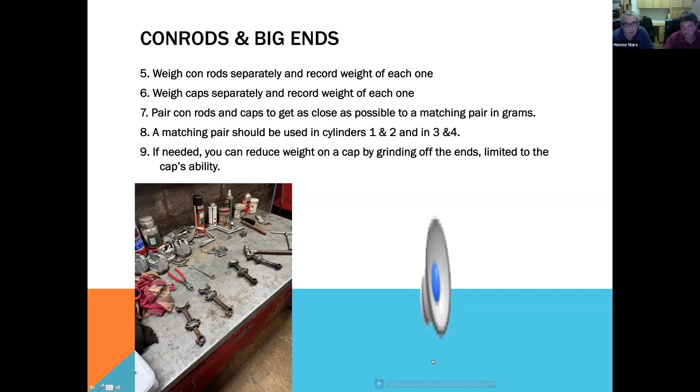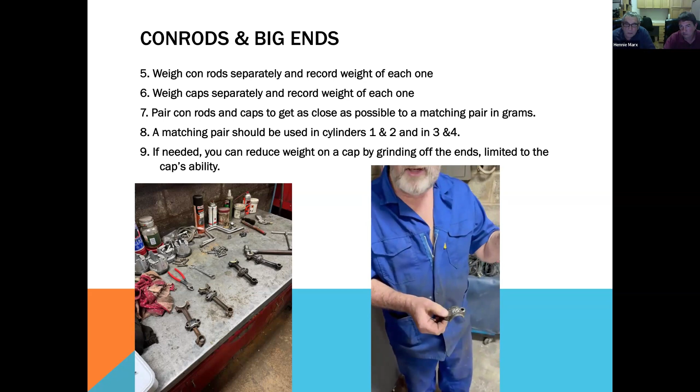Taking a little bit off there. Now, modern connecting rods on the small end have also got what they call a weight block, which means it's easy to take weight off end for end, which is the correct way of doing it. But because it's such a low revving engine, and also I'm adding white metal here, which is going to throw my weights out as well. But at least I'm reducing the places for...

Just a side note, on modern engines, the con rods have a 1 gram difference in weight, but on the Model T you allowed 2 grams of difference in weight per 2 cylinders.

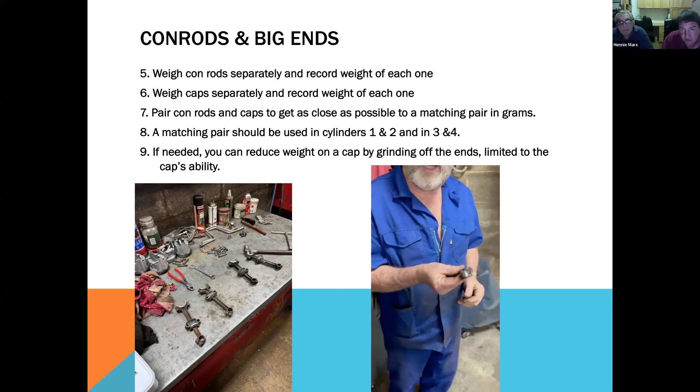So then, as Hennie said, you mark your corresponding caps and rods with punches, and then you place them in a con rod boring machine for the rough cut that we do before casting will commence.

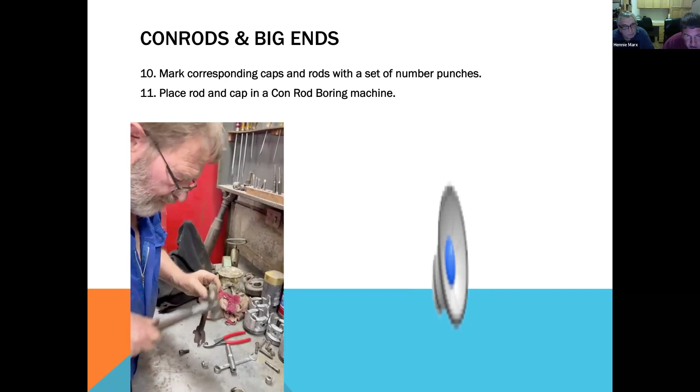What Kevin is doing now, he's preparing the con rod to go into his boring machine, and therefore he needs to have a stable point.

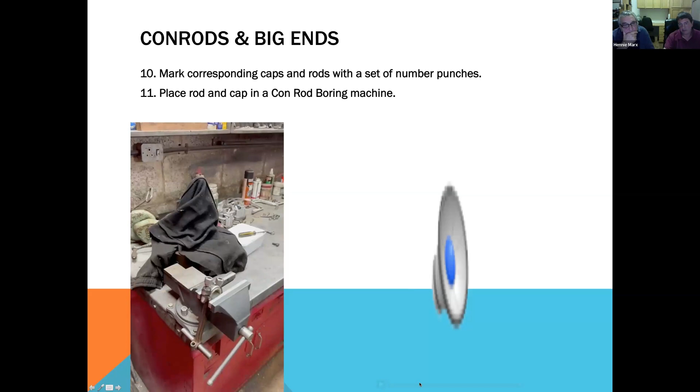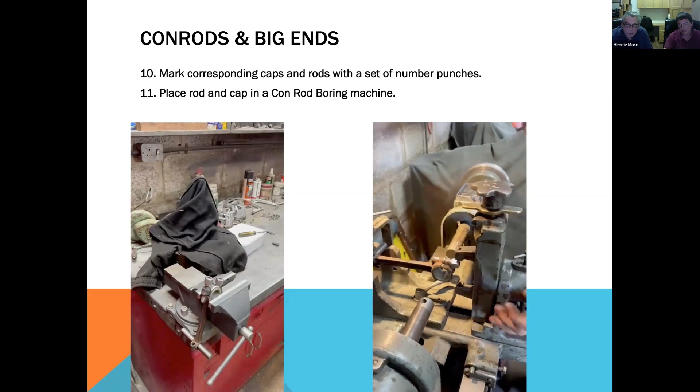Now watch what's happening to that rod. Yes, you see how I'm pulling it sideways? Now, to a certain extent, I can move it.

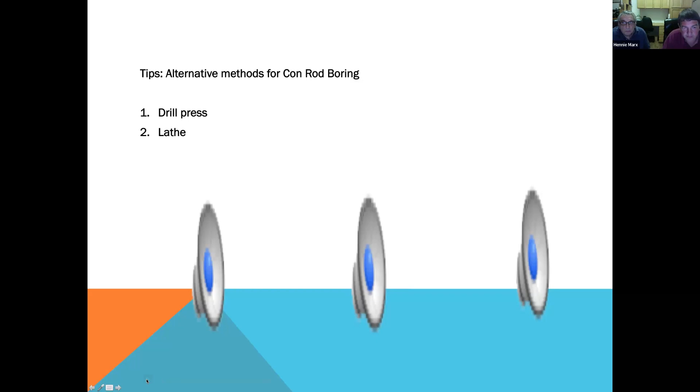So, if you don't have a Conrod boring machine, what are the alternative methods to do the job? Kevin explains now over here how you can use a drill press as well as a lathe to reach the same results, in one end of it.

That hole, you're going to put a gudgeon pin in. You can clamp it in there, you can weld it in there, you can do what you like. Welding is not the ideal answer. An accurate hole in a grub screw would be better because welding is inclined to pull you like that.

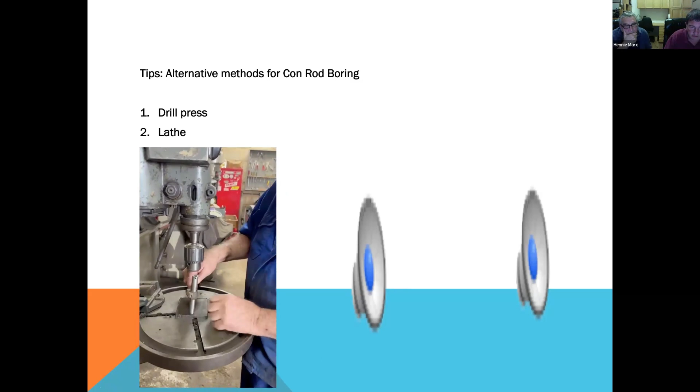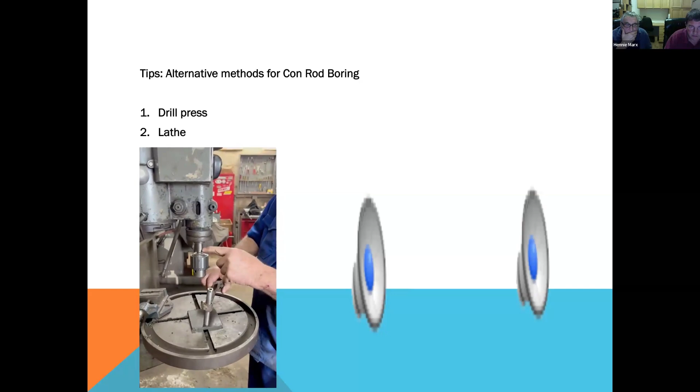Once you've done that, you take an old gudgeon pin, you put it in that hole, clamp it, then you move this plate over. The plate would be longer, of course. So we'll assume that this is now being held. We know now that this hole is square to here. And the gudgeon pin is now parallel to that shaft there. Gotcha. Yeah, so that's what we've got.

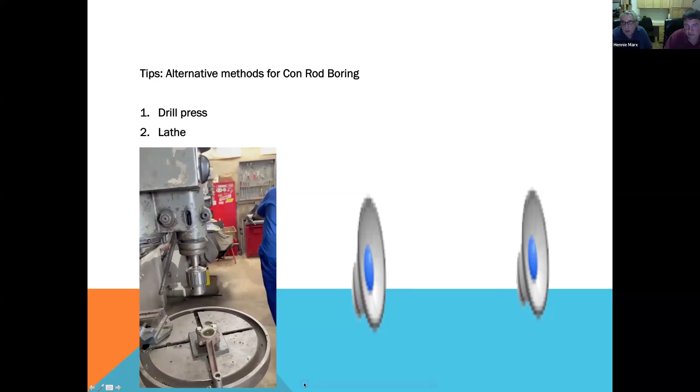Just as a support, what we're going to do is have a plate up here with a thread in it and a bolt. You thread it in and bolt it onto there. So when you put this in, you can center it up perfectly.

Touching there, because this is a constant, that's a constant, and that's a constant. So you hold that like that. You can put the head in this way, it doesn't really matter. What you've got to remember is every time you change the rod, one of these bolts must never be moved. You put a lock nut on it and leave it there.

So you back this one off a turn, you can take the end one out. Of course, you can take the rod off, and put the rod back in again, or the next rod, whatever. You can now bore this hole here, and face this side. You can then turn the rod over to face the last side. That's one way of doing it.

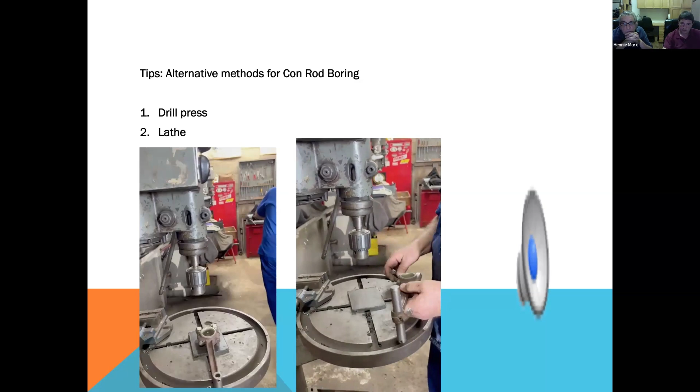You can do exactly the same thing in a lathe. It depends what you've got. Now, the one I did for Philip, he's got a method like this.

Put a piece of metal on it like that. And we're going to put a drill bit in there, or a boring bar, and we're going to drill a hole in there the size of your gudgeon pin.

This here is held here and it's clamped, it's got a light clamp on it, so this cannot move. By putting your drill bit in there and drilling a hole, you are holding this absolutely at 90 degrees, or square, to the axis of your lathe. So we put that through the hole.

Then once again, a grub screw or something to hold it. Now we've got a gudgeon pin sticking like that. Take our con rod, that's our gudgeon pin, it's like that. Now when we turn this back in again, we can go back in until the center line of your chuck is on that center line there. So now that and that are parallel, so this here must be parallel as well.

All you need now is, once again, a short fine thread screw in this plate under the nut. You're going to put in a lock, and another one here to hold that, and adjust that like that. So now we've got this whole thing held there on the center line.

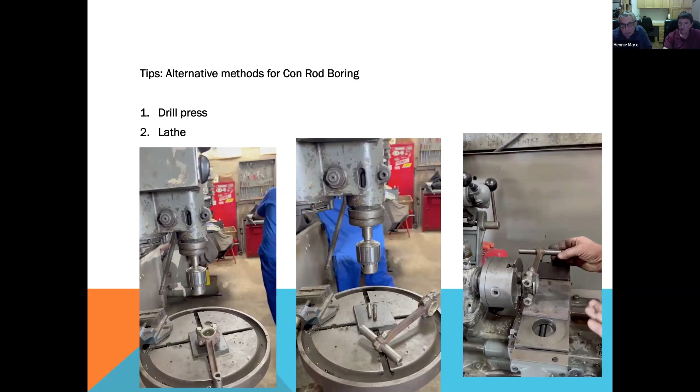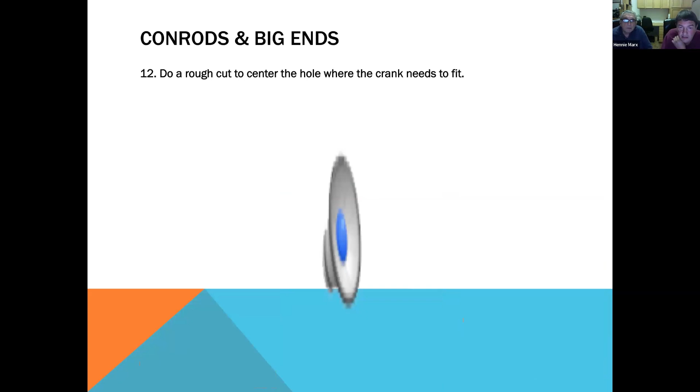Right, now you want to bore. So then you do a rough cut to the center of the hole where the crank needs to go in, like this.

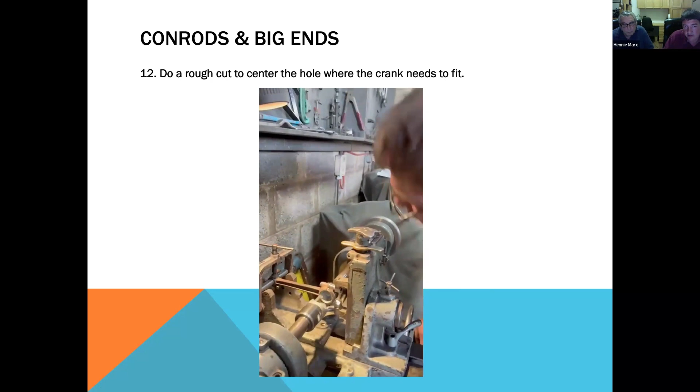Die caps en die conrods is nou skoon en netjies. Dit is 'n goeie voorbeeld van voor ons begin het, van baie ouens wat byvoorbeeld na die white metal op 'n conrod en 'n cap kyk. Ek het dit vir Philip gestuur, en hy het ook gevoel die defekte op die white metal wys vir ons definitief dat daar nie goeie hegting is tussen die metaal en die white metal op die caps nie.

Dit voorspel waarskynlik probleme vorentoe en dis wat 'n ou laat besluit het om dit maar heel oor te doen. En terwyl jy in is, in for a penny, in for a pound, en daarom doen jy hulle almal oor. Die white metal is belangrik, maar as daar 'n defek op is, moet jy dit glo onderliggend baie dieselfde behandel.

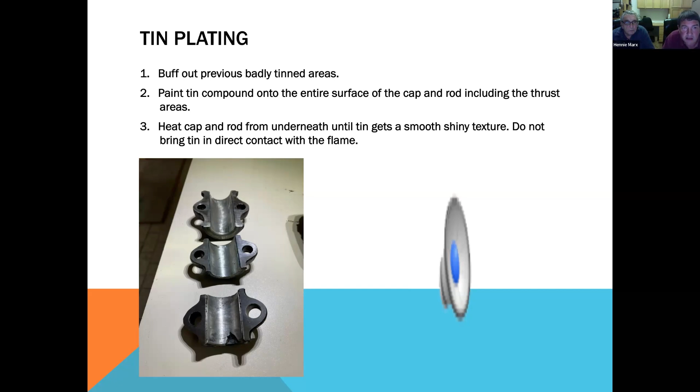But do not bring the tin in direct contact with the flame, was what Kevin told us. So you can see there, the position of the flame is very important there. You need to heat it from underneath.

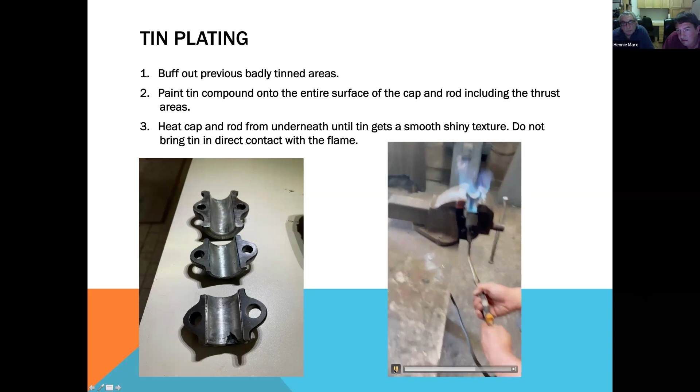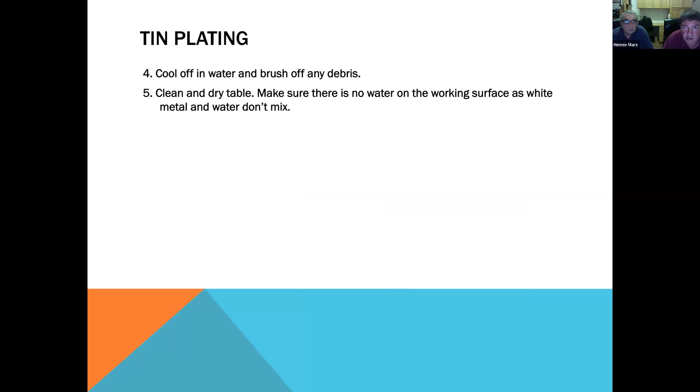After that, you cool it off in water and then you brush off any debris. There'll be little black spots that you just brush off. Then clean and dry your table. Make sure there's no water near because white metal and water don't mix.

Dan kom ons by die mold gedeelte. Daar verskil dit baie vir die ouens wat al gekyk het op internet. Daar's baie detail molds wat bestel kan word. You can order it from the US, and they're quite detail orientated and quite easy to use also. Maar Kevin se molds is eintlik baie maklik om te maak en baie maklik om te gebruik.

So you will see just now, you put the caps and the rods in the molds, and you've got nice little stands made especially for that purpose, and then you put it on the stands. And when you put the molds on, you must seal off with gun-gum, otherwise your white metal will just flow right through and you will have a lot of trouble with that.

In the meantime, your white metal must be heated up in a pot on the primus. You will not get the desired temperature with the primus alone, you will also need the blowtorch for that, and you will go up to about 400 degrees Celsius. At the same time, you will heat up the caps up to about 150 degrees Celsius. Then you can start with the pouring.

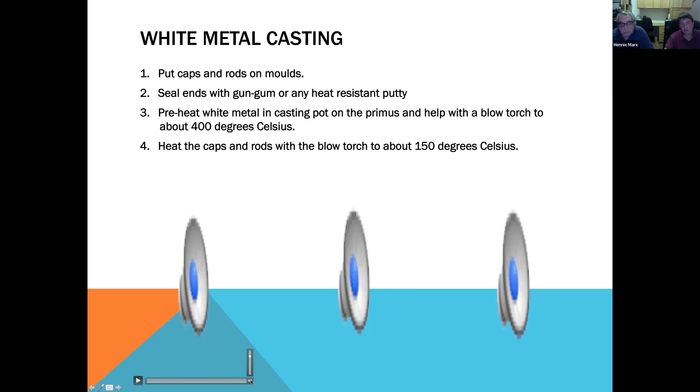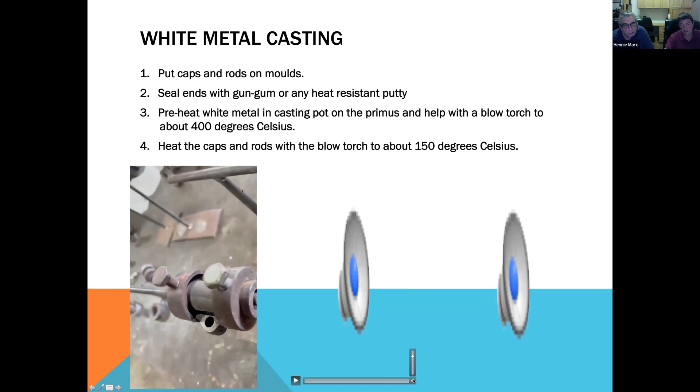I'm going to pop it on there. Daar's die stand, werk baie goed. Basically, all that's going to happen now is I'm going to preheat that to about 150. You want to do it the old way. When you preheat it, you warm it.

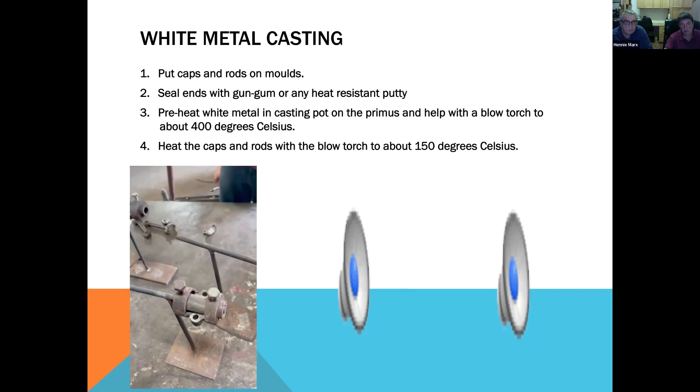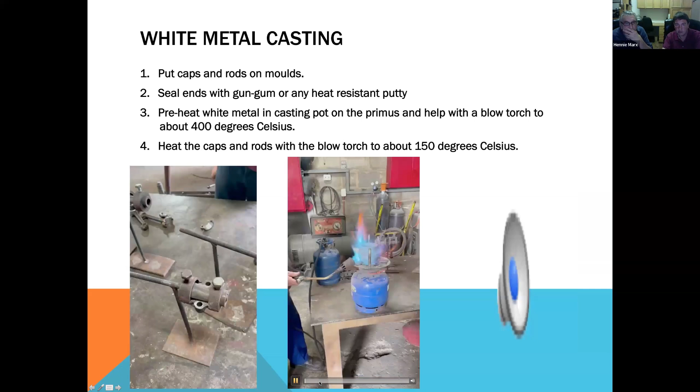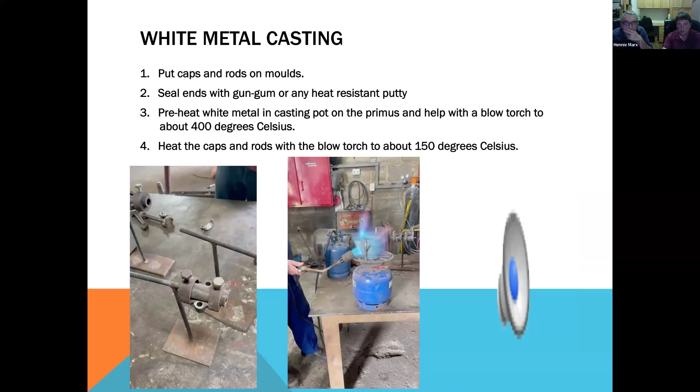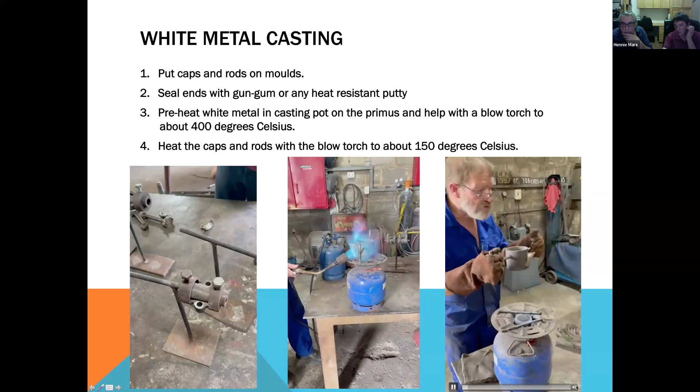And if you put a bit of spit on it and it sits and boils, it's not hot enough. If it starts dancing like that, then it's the right temperature, and that's about 130, 150 degrees. So basically, all I'm going to do to that now is one shot. But yes.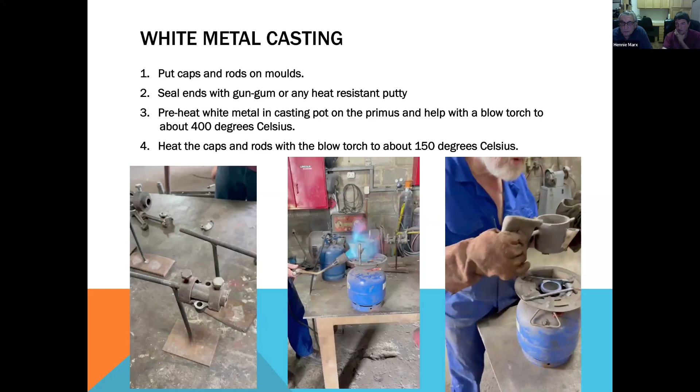Okay. Sorry. Hy sê lekker man. En as ek sou moet hierdie ding skoon gemaak het, maar ek trek nou van onderop, so ek is nie baie bekommerd daaroor. So al wat ek nou kan doen, sien hy kom mooi skoon daar so. Ja.

Die word mooi deur aan. Ja. So, sien ek laat hom net bietjie solidify, dan kan ek hom op top opgee. As hy nie heeltemal level is nie, dan sak hy.

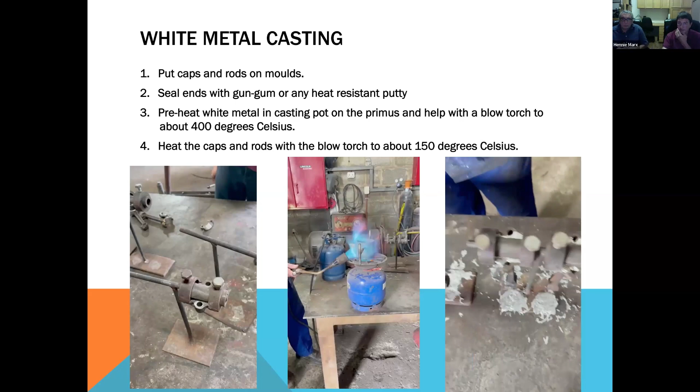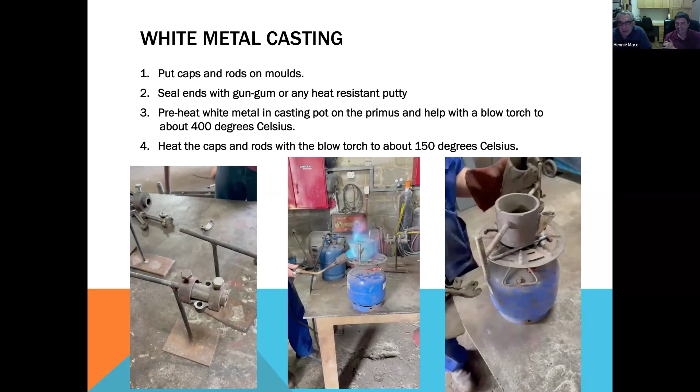So as you saw, the white metal was cast into the molds. Then you leave it to cool off, take it all apart, and use a flat file to file off any excess white metal, basically just until it's level. Then we need shims, three shims on each side of the cap when assembling it to the conrod.

What we did there with Kevin was we made shims out of an old cool drink tin. The shims are used later on as your bearings wear in, so you can remove some of the shims to get a snugger fit onto the crankshaft.

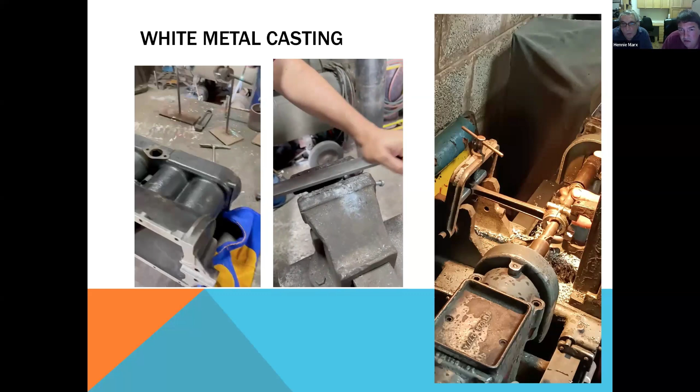Tertius, just a question, when you do the cutting there on the lathe, do you have your three shims in place or not? Yes, you do that with your shims in.

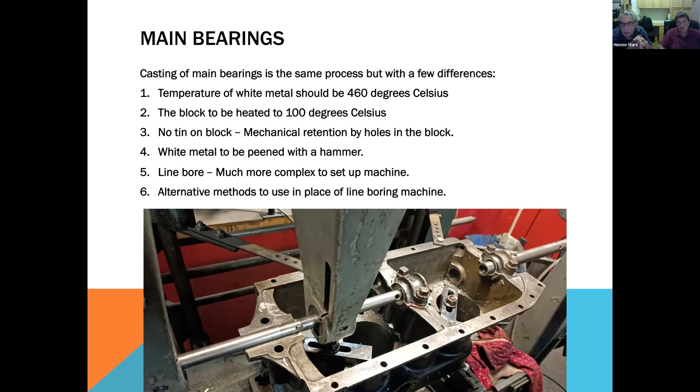But if you don't have the machine, then you've got a problem, and therefore there's quite a nice frame that Kevin made so you can do your own line boring without using a machine like this.

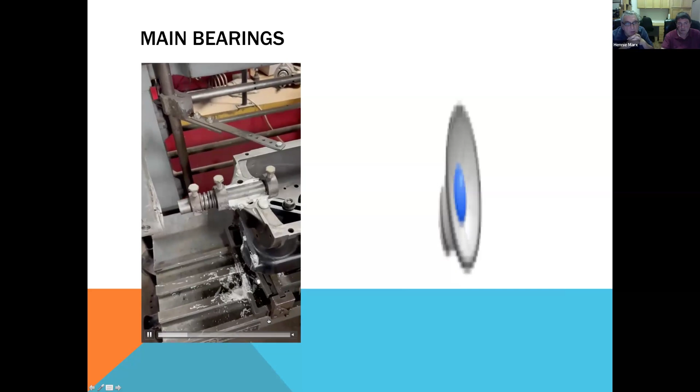There's the mold in position and it's cast. The others are already out.

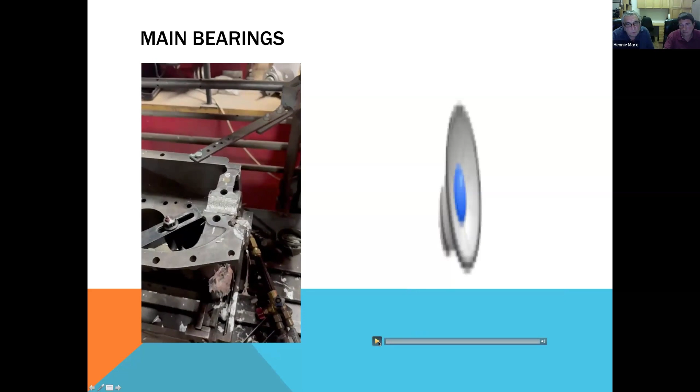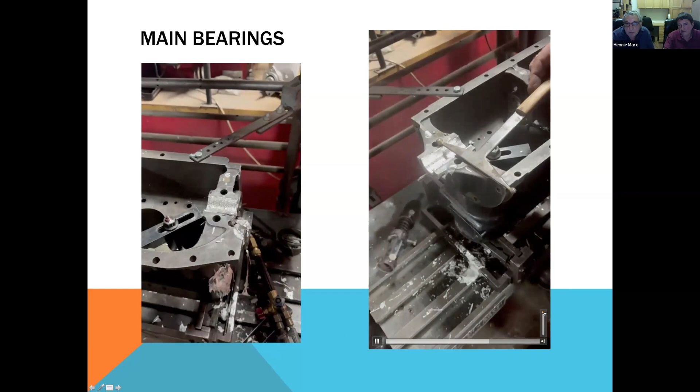And that's how you cast white metal on a Model T block. Thanks.